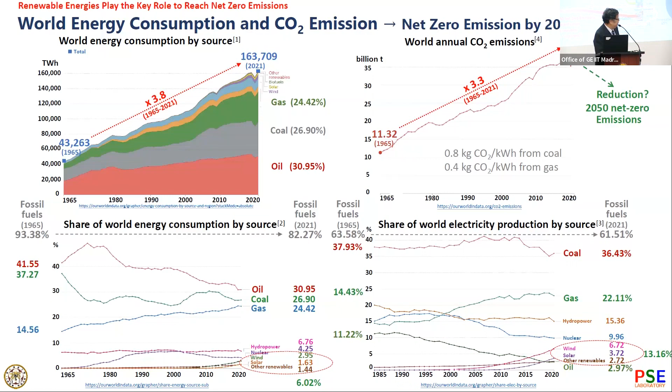So under such conditions, how to reach net zero emission in the near future? The first method is full electrification, and the second is full renewables. Of course, these are very, very challenging problems. In the plan, I think we have 60 gigawatt wind power and 85 gigawatt solar power in the near future, based on the current plan.

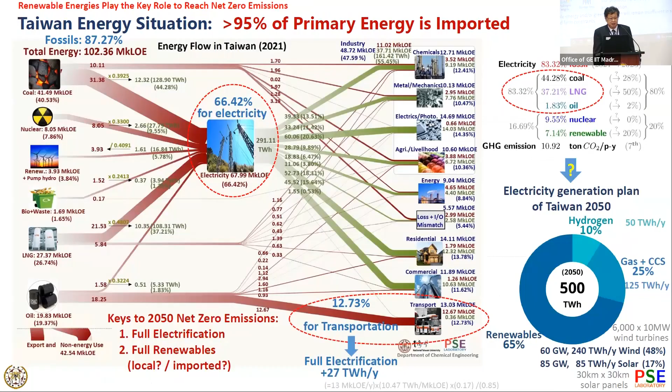The battery is running out. Not mine, the computer. The battery is running out.

So in this case, hydrogen is an energy carrier of intermittent renewable energies, because renewables will take about 65%. So the problem is a high percentage of intermittent renewables. Renewables, of course, can directly provide electricity to the public grid. But due to the intermittent characteristics, we need suitable carriers to store surplus renewable energies and provide additional electricity in deficient situations.

So further to pumped hydro and batteries, I think green hydrogen from water electrolysis has been accepted as the effective low carbon energy carrier. However, renewable energy and green hydrogen will remain insufficient in some locations due to wind farm constraints, like Taiwan. It's a very, very small island, so it's impossible to provide all renewable energy by ourselves.

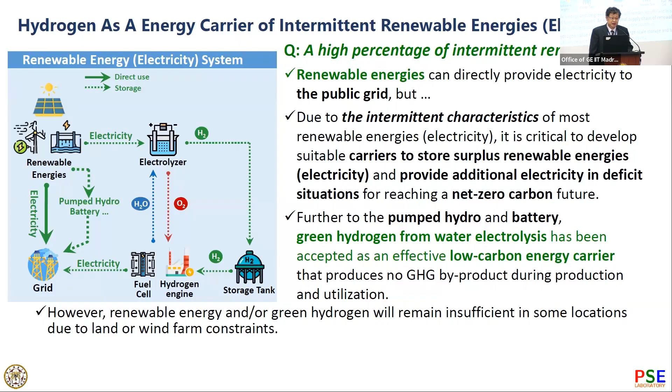So we need a hydrogen value chain. An international supply chain of renewable hydrogen is required. We have to build a green hydrogen value chain for long-term and large-scale storage and transportation. But Taiwan, Japan, or even Korea is different from Europe. So it's a great challenge for long-term transportation and large-scale storage. The pipeline system is almost impossible for Taiwan or Japan.

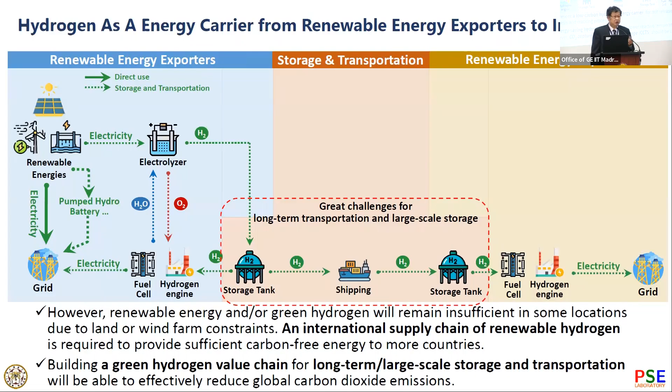So we need some chemicals to store large amounts of energy. Two chemicals are under consideration: one is ammonia, and another is methanol. If we compare the synthesis and liquefaction, the storage and transportation, and the cracking and reforming, we can see that methanol and ammonia have different characteristics.

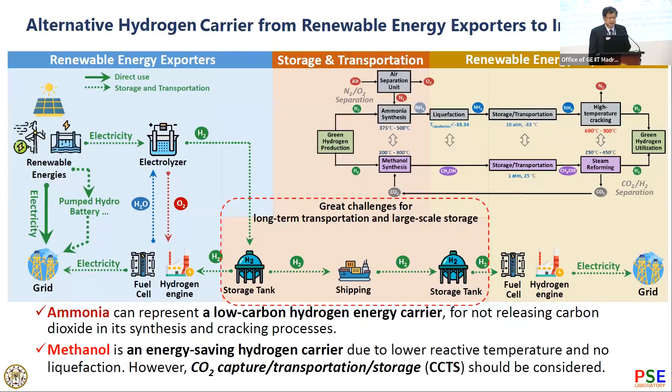Ammonia may be a low carbon hydrogen energy carrier because no CO2 is involved. But methanol may be an energy saving hydrogen carrier. In the meantime, we have to consider CO2 capture, transportation, and storage problems. So here is the proposal. At first, the electricity should go to the grid, the second choice is pumped hydro and battery, and third is the electrolyzer to generate hydrogen.

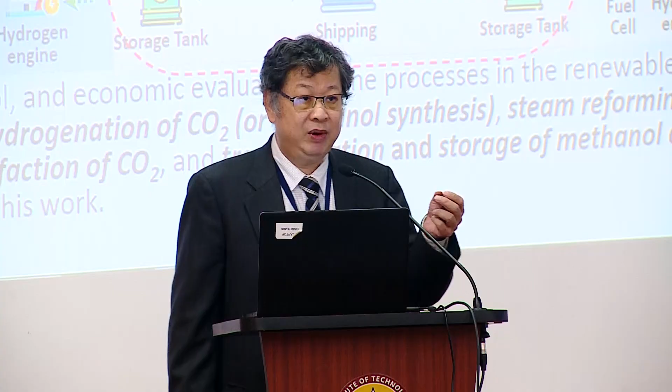But suppose the hydrogen is going to be transported far away, some of the hydrogen can be synthesized into methanol and then shipped to other places. For example, from Australia to Taiwan takes 1 week. From Qatar to Taiwan takes 2 weeks. From America to Taiwan takes 1 month. So the shipping problem is very, very important.

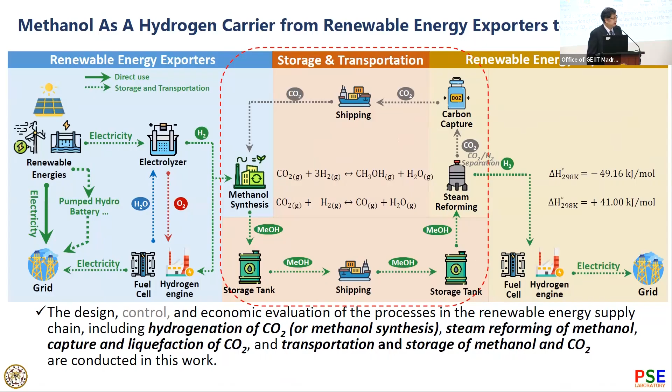We can store large amounts of methanol in the importing countries. Then when we need hydrogen, we can use the steam reforming process to generate hydrogen again, capture the CO2, and ship it back to the exporting country. So here are the critical steps concerning low carbon renewable energy supply chains. The key points are methanol synthesis and methanol reforming.

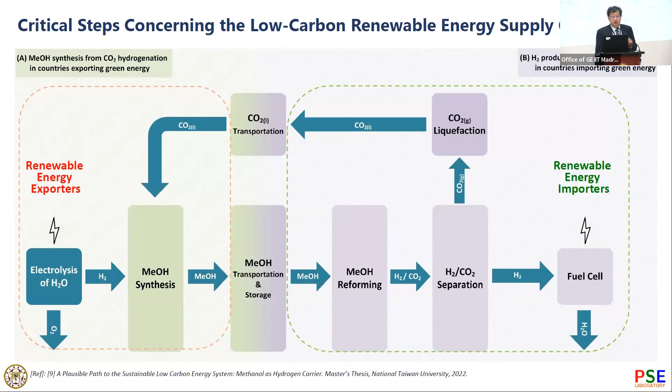So here is one possible process, the proposed process. The hydrogen and CO2 can be synthesized in the methanol reactor. Here are the separators, the gas-liquid separator and liquid separator. So we can generate very pure methanol for transportation. And I would say that a better process is in progress.

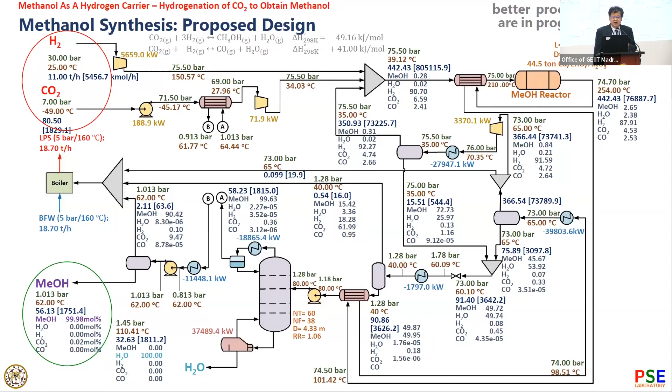And here is one possible process for methanol reforming. For the importing country, the methanol goes to the steam reformer and water gas shift reactor to generate the hydrogen and CO2 again, and we use MEA to absorb the CO2 to generate high purity hydrogen, and then we can capture the CO2 in a liquid state so it can be sent back to the exporting country.

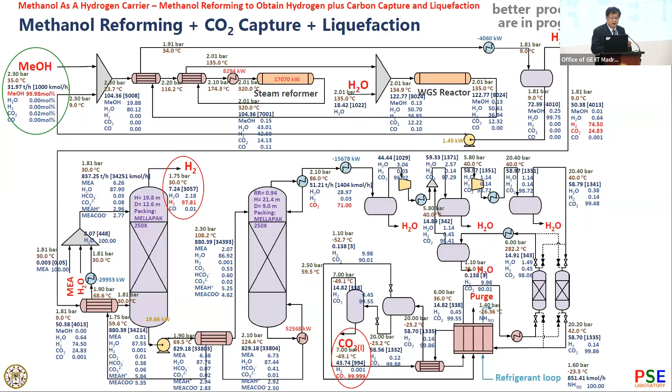And here are some details about the cost of each step. As we can see, the basis is 1 ton of methanol. We take this amount of electricity for electrolysis to generate the hydrogen, and the money is 68.5 US dollars.

And then the cost of the synthesis and the cost of the transportation of the methanol. And here's the cost of the methanol reforming. And as you can see, the cost of separation of hydrogen and CO2 is quite high. And here's the cost of liquefaction and the transportation of CO2.

So based on this hydrogen, we can use some fuel cells, for example, to generate the electricity in the importing countries. You can compare the electricity here in the importing country and electricity from the exporting country. So they are quite different. So it costs a lot.

So concerning the cost, the basis is 1 ton methanol. So 232 is the cost to handle this value chain by methanol. And 280 is the cost of the electricity in the importing country. I forgot to mention that I suppose the renewable energy price in the exporters is $30 per megawatt hour.

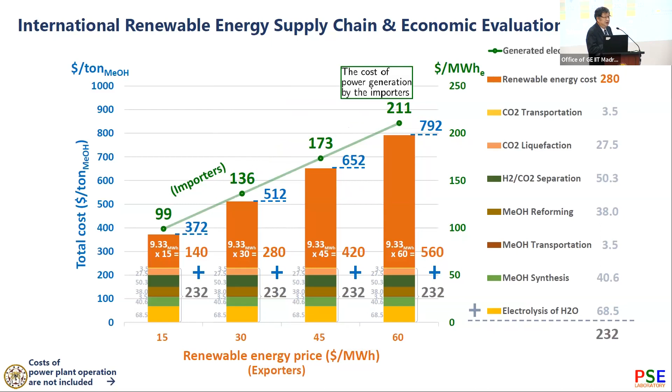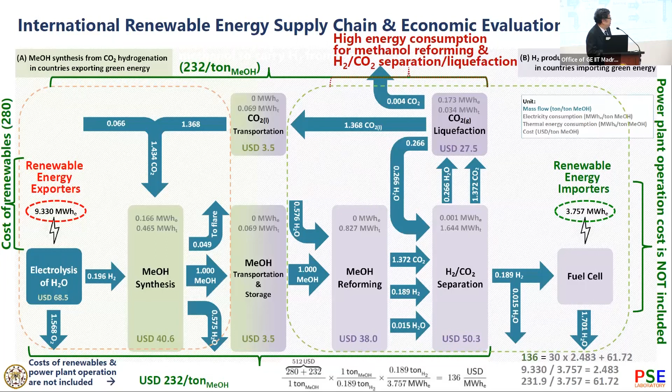So here we can look at the cost of the supply chain again. We can see that the cost here in the importing country, concerning the methanol reforming and the gas separation and the CO2 liquefaction, takes a lot of energy. So another project is to reduce the cost here. So our method is to use the oxy-combustion methanol-fired power plant, and CO2 is captured in liquid state in the meantime. Here is the power plant.

So the working fluid is the CO2. So here's the liquid CO2. And liquid CO2 can mix with the pure oxygen. And here's the gas phase, the CO2, high pressure, 300 bar. So the turbine can generate electricity. And we can remove the water, and obtain the high purity CO2 again, and compression, and then with chilled water. So in that case, it will become the liquid phase.

So in that case, extra liquid CO2 can be removed. So it's a carbon capture directly. And the other liquefied CO2 can separate and increase the pressure again. So here is the oxy-combustion methanol-fired power plant. So in this case, we don't have to use the methanol reforming and an additional independent step for carbon capture. So in this case, we can reduce the electricity price in the importing country.

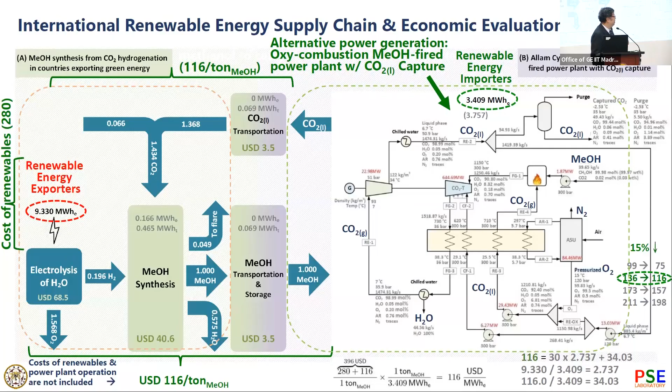So I would like to make a conclusion because time is limited. In this work, we use hydrogen as a carrier of renewables, and methanol is a hydrogen carrier. So in that case, we can deliver energy from exporting countries to their end users. For Taiwan, exporting country means Qatar or Australia. And the overall cost of utilizing methanol as hydrogen carrier, you can see from here, for each ton of methanol, it takes $232 US.

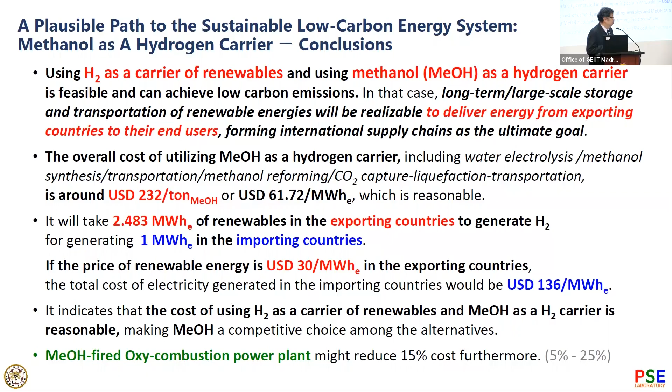And for 1 megawatt hour in the importing country, we need 2.5 megawatt hour of renewables in the exporting countries. So if the price of the renewable energy is $30 in the exporting country, then the cost of the electricity will be $136 in the importing country. And the methanol-fired oxy-combustion power plant has the chance to reduce 15% cost.

So here are my students. Thank you. Thanks, Prof. Chen, for sticking to time, taking us back at least to our trajectory. Any question for Prof. Chen? One question? Two? I'll take one from...

François Maréchal, EPFL. You have not considered electrochemical systems for converting methanol into electricity in fuel cells, for example. Direct methanol is one of the options, no? Another chemical? No, converting methanol into electricity with electrochemical systems like a fuel cell. No, in this case, I count the efficiency about 60%, but not the details. Well, you can reach higher efficiency if you go to electrochemical systems, right? Yeah, it's possible. Okay, thank you very much for the question.

Or maybe just one more. Prof. Chen, a nice presentation. I have two questions. First of all, do we have the capacity, the scaling of fuel cells that will be able to supply the electricity demand of, let's say, Taiwan? Do we have that scale-up that is needed for fuel cells? The second question is, have you compared with MCH, methylcyclohexane? Because that's liquid on both sides. So how does methanol compare with that?